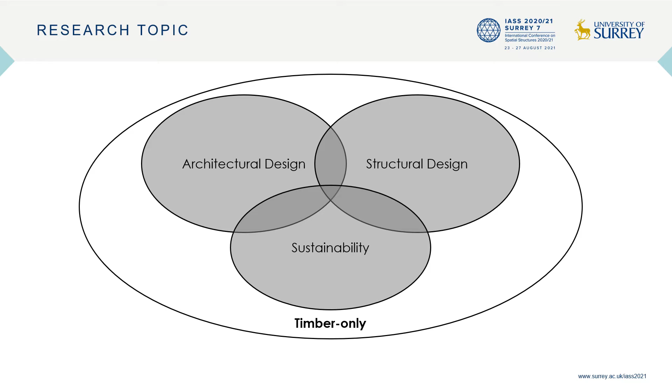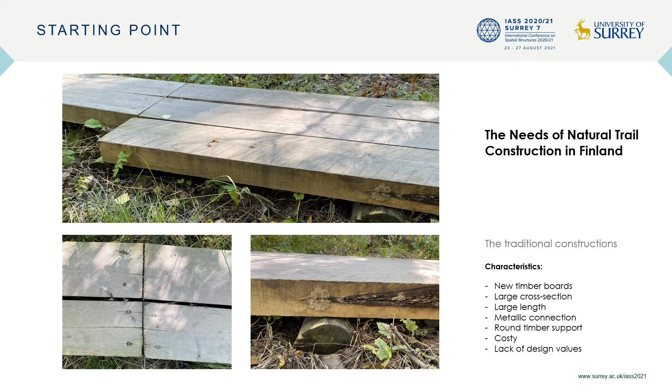Our research investigates the intersection of architectural design and structural design with an aim of tackling the environmental challenges in the context of timber-only structures. As a starting point, we focus on local constructions and try to find sustainable, economic, and durable alternatives. In Finland, which is full of forest areas, we have a large amount of needs to build nature trail structures. However, the traditional construction approach requires new timber boards with large cross-section and large lengths, and it is normally very costly.

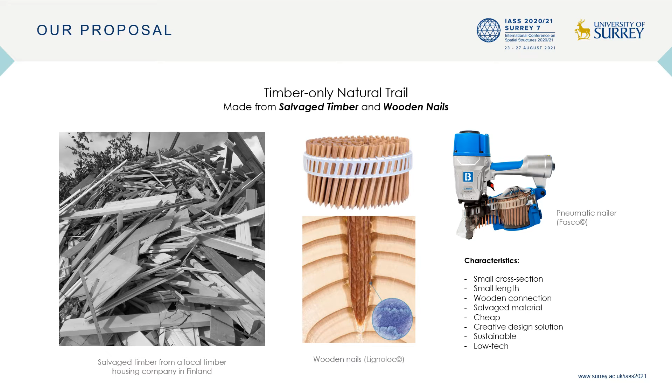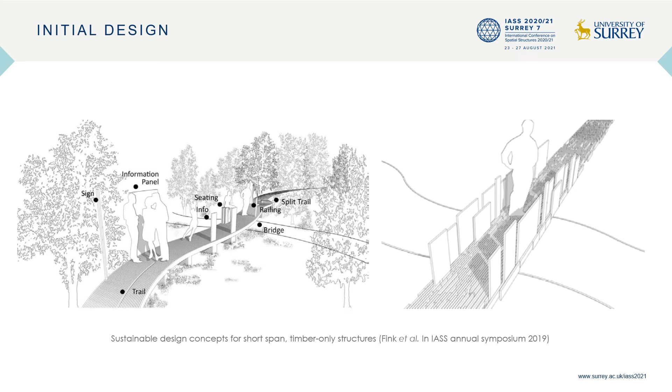As an alternative, we proposed a design concept for timber-only nature trails, which are realized by salvaged timber and wooden nails, which means the entire structure will be realized by timber only. An initial concept has already been introduced in the last IASS conference in 2019. Based on the preliminary research and findings, we propose an integrated design concept which considers material, connection, structure, and architecture by using salvaged timber and wooden nails only.

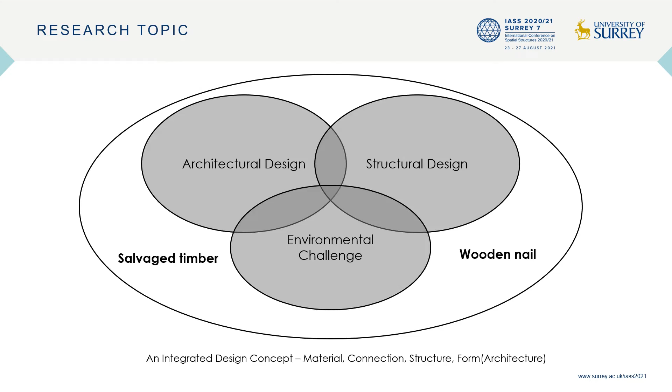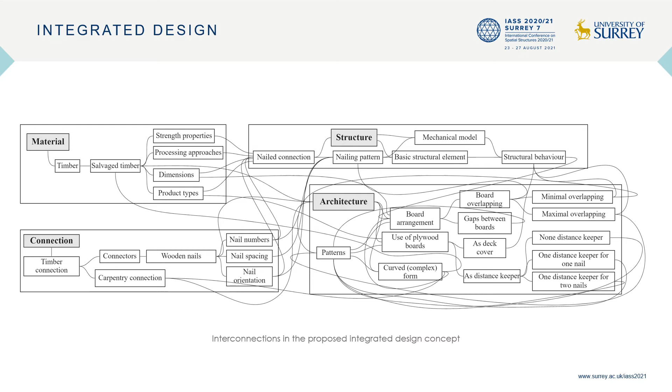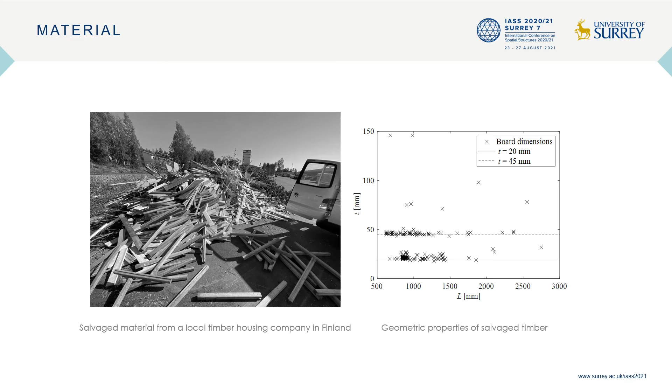As a design sequence, we start with material and connection in parallel and merge them into a structure and then merge into an architectural form. However, the four aspects that we highlight are highly interconnected, and the process forms feedback loops in our design concept. For the material, we use salvaged timber from a local timber housing company in Finland. Those materials are mainly timber cutoffs. We also established a database to record the geometric properties of the salvaged timber boards.

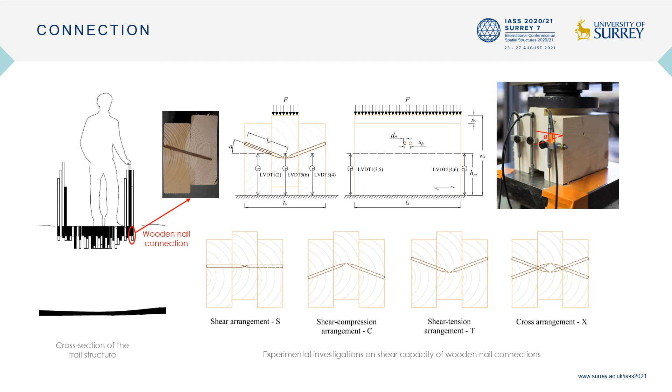In parallel, we investigated the structural behavior of wooden nail connections to connect salvaged timber boards. A series of experimental investigations were conducted to find out the most optimal use of wooden nail connections. For example, we conducted shear tests to find out optimal nailing angles of the connection. We also conducted a series of bending tests to find out the moment resistance of the connection.

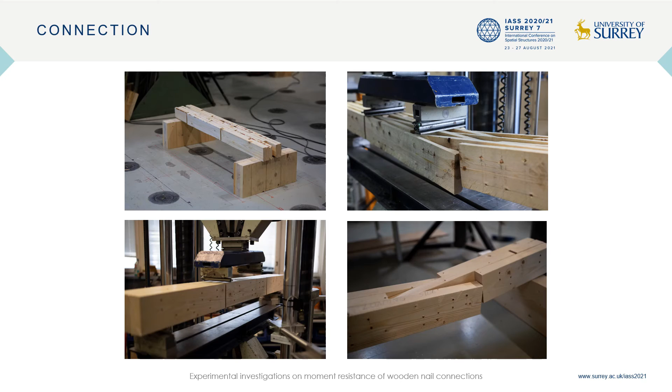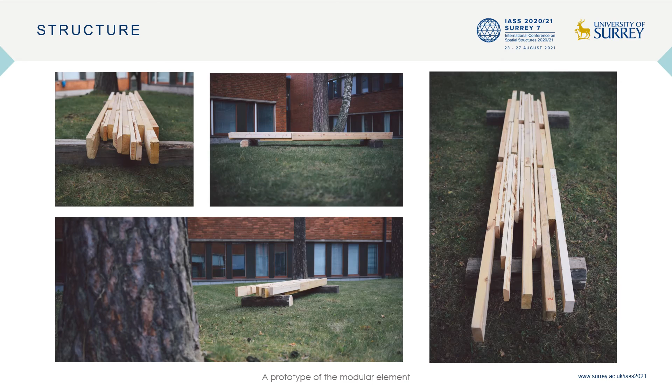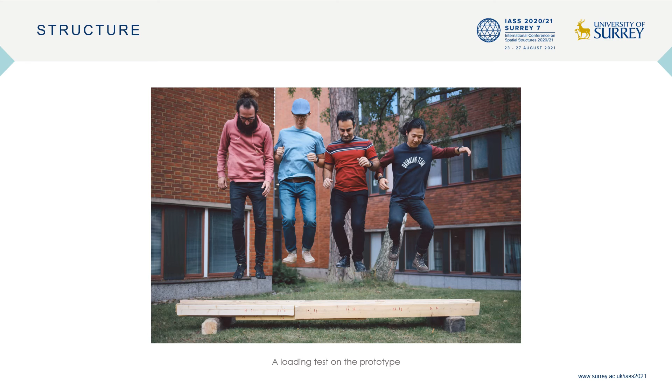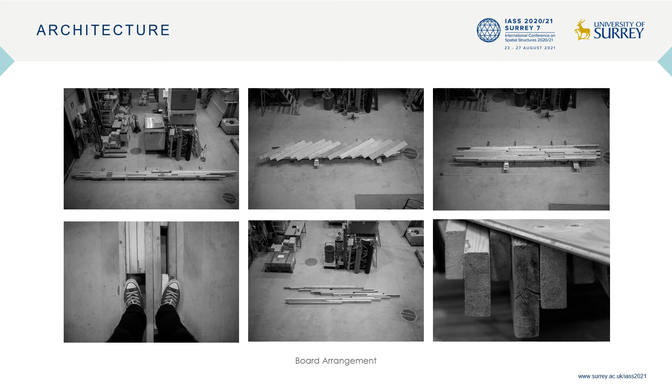Then, as a merger, we integrated the findings from material and connection into a structural prototype. The prototype is a 2.4 meter span, simply supported beam-type structure. We also tested it by allowing people standing and jumping on top of the structure. As a result, a considerable load-bearing capacity and the pedestrian load can be identified. In the next step, we explored the architectural diversity of the structure and the patterns created by different board arrangements.